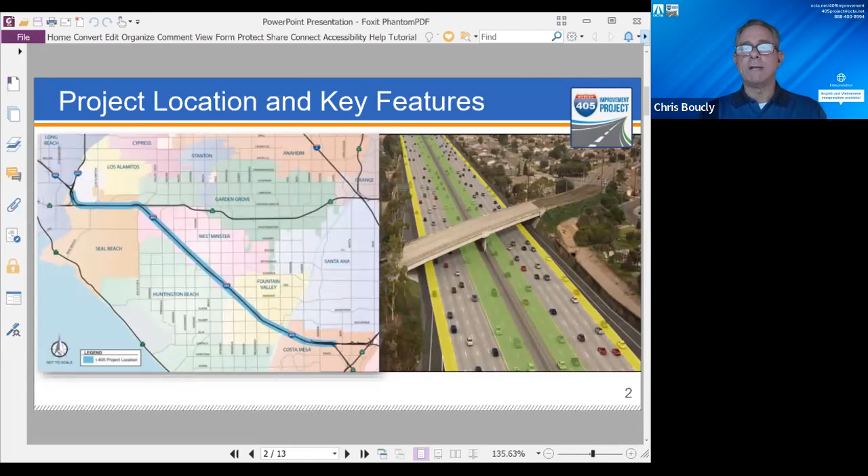In this slide, on the left you can see the project limits are from about State Route 73 in Costa Mesa to Interstate 605 in Seal Beach, a length of about 16 miles. On the right, one regular lane will be added in each direction of the 405, consistent with Measure M, shown in yellow. An additional lane will be added in each direction that combines with the existing carpool lane to provide dual express lanes, running from State Route 73 to Interstate 605, shown in green.

On this next slide, you can see some of the major features of the project. We are replacing 18 bridges as part of the project, widening 4 others, and constructing a new connector for the express lanes between State Route 73 and Interstate 405, at the south end of the project. We're also building more than 150 walls throughout the project area, and there will be new bike lanes and sidewalks on all of the replaced bridges. The overall cost of the project is approximately $2.08 billion.

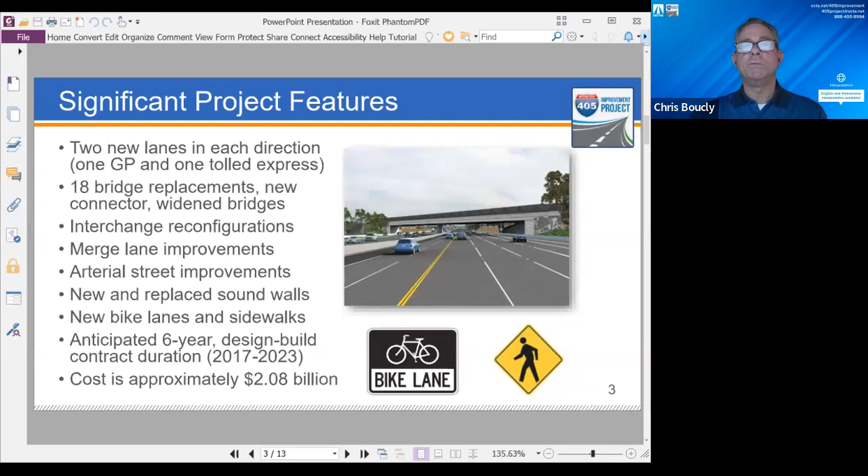Next slide. So we're really excited to share that the project is a little over 60% complete, and more than 1,000 workers are involved in the project each day. These next several slides show construction progress out on the project.

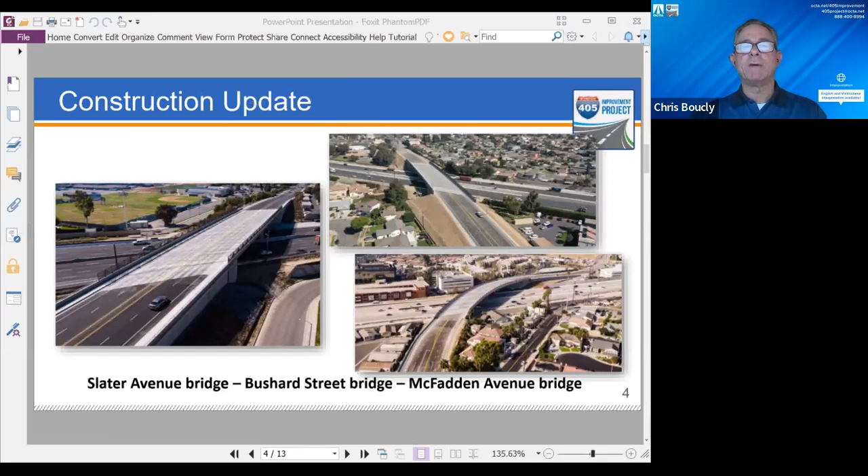On this slide, you can see the first of 3 bridges that were completed and open to traffic. Slater is shown on the left, Bushard in the upper right, and McFadden in the lower right. Next slide. This one shows more completed bridges, with the Talbert Bridge on the upper left, the Magnolia Bridge below that, and the Edwards Bridge on the right. Edwards opened in September, our most recent bridge opening, prior to Edinger's opening yesterday.

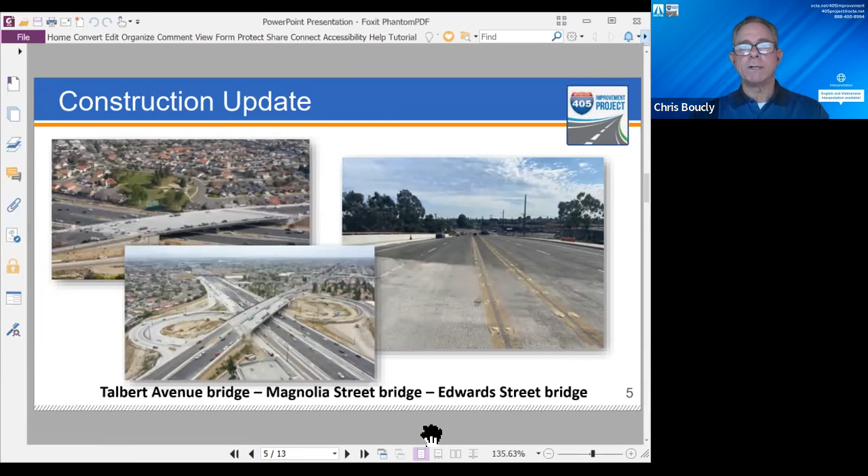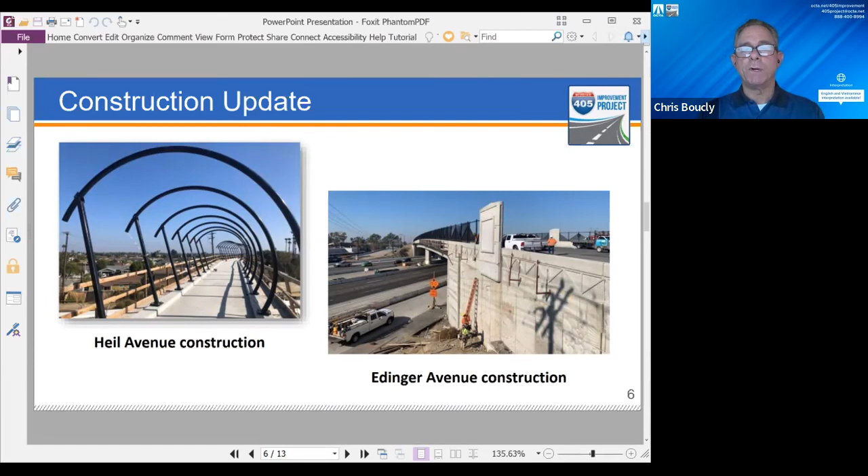Slide 6, the photo on the left shows reconstruction of the Heil pedestrian overcrossing. This is really starting to come together, you can see these arches. These will all be covered in fencing, so nobody will be able to fall off the bridge or get out there. This pedestrian overcrossing is set to be completed and open to pedestrians by the end of this month. The photo on the right shows the reconstruction of the Edinger Avenue Bridge, which, as I mentioned, opened to traffic Wednesday morning.

Slide 7, on the left is a view of the first half of the new Westminster Boulevard Bridge. Right now at Westminster, crews are installing falsework for the second half of the bridge. Falsework is that temporary structure that supports the bridge while it is being constructed. The second phase of the Westminster Bridge is anticipated to be completed in summer 2022, next summer.

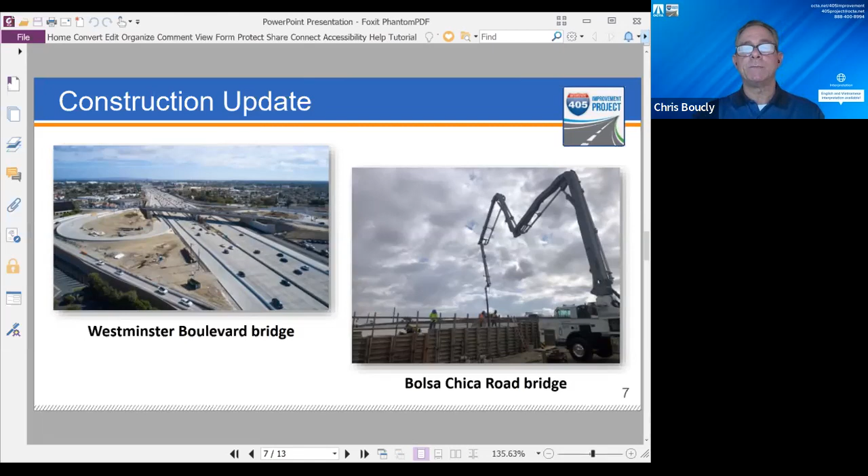On the right, crews are pouring concrete for the second half of the new Bolsa Chica Road Bridge, which is nearing the end of construction. It's anticipated to fully open to traffic in about mid-December, along with the southbound Bolsa Chica ramps. There is still some street restoration, traffic signal, sidewalk, and median work anticipated to take place through early 2022.

On this slide, the image on the left shows the completed first half of the Bolsa Avenue Bridge. If you drive this area, you've probably noticed that the realigned northbound loop off-ramp just opened as well, which is great news for the community. We expect intermittent closures of that ramp in the future to wrap up work there. Meanwhile, crews continue working on the second phase of that bridge, anticipated to fully open to traffic in late 2022 or early 2023.

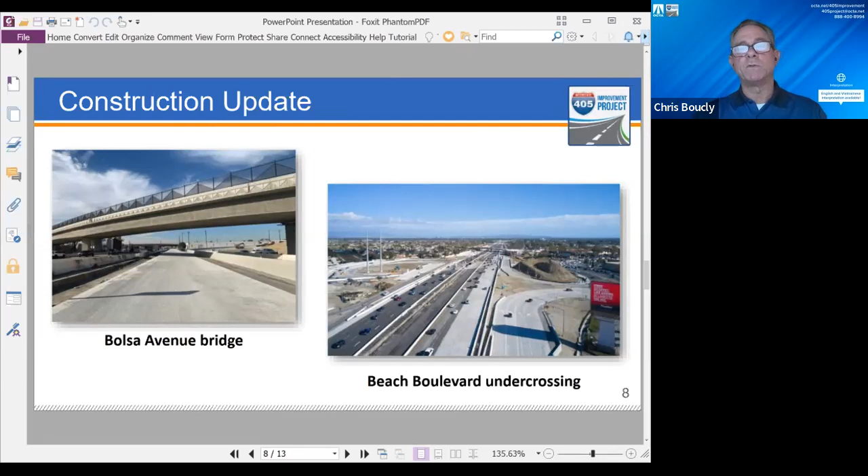The photo on the right is of Beach Boulevard. The widened freeway in this area required building new on-ramp structures in both directions. Those structures are mostly done, as is the new intersection where the southbound ramps meet Center Avenue by Bella Terra. Final paving activities for the northbound ramps should be done in early 2022.

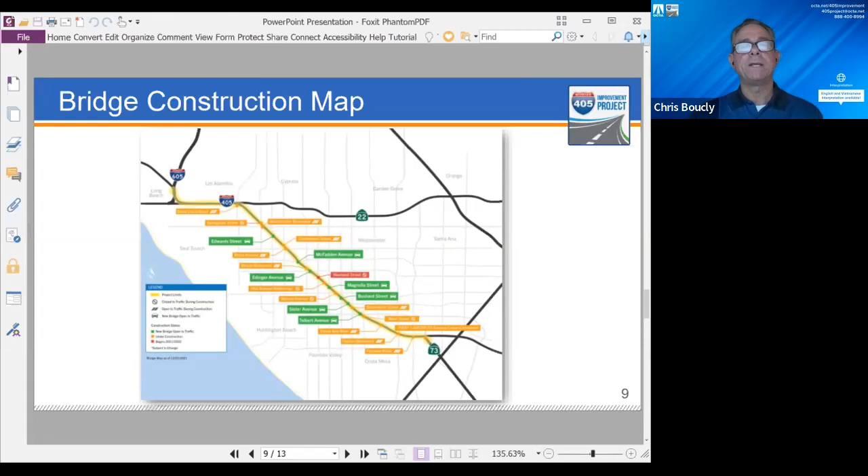Nicci. Right, thank you, Chris.

So now we'd like to focus on the Newland Bridge. The bridge will be closed completely on the morning of December 6th, and it will take approximately 18 months to rebuild. We know it's inconvenient to have a bridge completely closed like this, so we really appreciate the community's patience. We'll talk about the approved detours in a couple of minutes.

Once the bridge is closed, pre-demolition activities will begin almost immediately. That includes concrete removal and removing what is known as the lost deck, as well as removal work at the abutments, or the sloped sides of the structure that hold up the bridge.

Demolition of the bridge spans over the freeway is set for December 10th and 11th and will require full freeway closures. We'll provide additional details about those closures in upcoming alerts. Demolition activities will continue for several weeks during the day and at night.

Generally, day shift hours are 7 a.m. to 4 p.m., with crews mobilizing their equipment as early as 6 a.m. The night shift hours are 9 p.m. to 6 a.m., and typically night work consists of removing demolished materials, which requires lane closures. Caltrans generally only allows lane closures at night because traffic volumes are lower than during the day.

Now a little bit about construction of the new bridge. For the first few months, crews will construct the foundation, which includes shoring activities, excavation and earthwork, and placing settlement fill at the abutments. This involves placing large piles of dirt where the abutments will go, to compress the soil in those areas, ensuring that once the bridge is constructed, it doesn't settle any further.

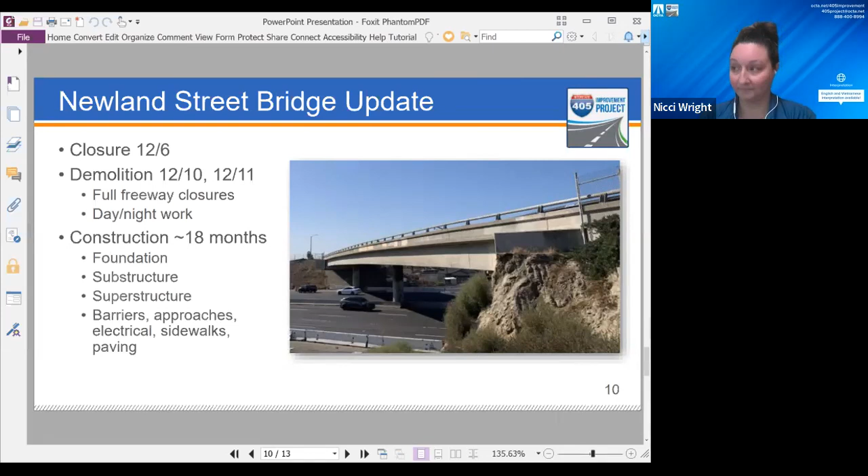Now let's talk about the detours to get around the Newland Bridge closure. We've included a link to this map in the chat so you can download it. The bridge will be closed between Edinger Avenue at the north end and just north of Berry Place at the south end. The driveway to the residential neighborhoods along Newland Street will remain open during construction.

As you can see on this map, the detours in green are for cars, pedestrians, and bicyclists, which is Newland to Edinger to Beach to Heil and vice versa. And remember, Edinger is now open and the Heil pedestrian bridge is expected to open later this month.

For large trucks, the detour is Newland to Edinger to Magnolia to Warner and vice versa. The detour routes for northbound and southbound Newland will add about a mile of travel distance for motorists and are expected to add a maximum of 4 minutes to travel time. For pedestrians and bicyclists, the added travel distance will also be about a mile, adding about 20 minutes for pedestrians and about 5 minutes for cyclists.

The traffic analysis evaluated existing conditions and available capacities of the roadways used for the detour routes. It looked at assumed detour volumes and trip distribution, meaning which approved detour routes motorists are most likely to take, and showed that these routes can handle the detour traffic, though service won't be perfect. The signal timing and configuration will be adjusted at several intersections to ensure traffic flow is the best it can be along these detour routes.

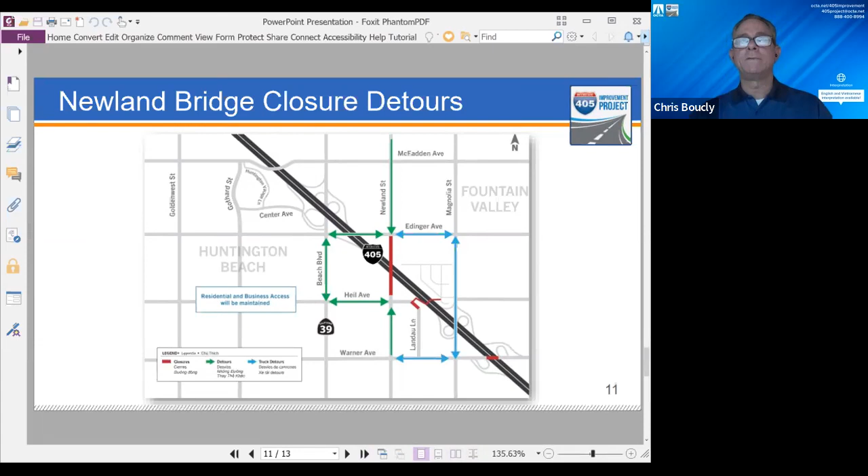Great, a lot of information out there. Thank you, Nicci. We're happy to go over any of that in the Q&A session if people didn't catch it. Now, I'd like to talk a little bit about our outreach strategies.

You can sign up for those updates, both project-wide and bridge-specific, using the links in the chat. These email updates are a quick and efficient tool to alert the community to new information on activities and schedule updates. We also post frequently on social media, Facebook, Instagram, and Twitter. You can find closure and detour information on our interactive map at octa.net/405map, and that same information is also available on the navigation app Waze.

Finally, while we like in-person discussions for major updates like this, we will be continuing to meet virtually with the community for the time being.